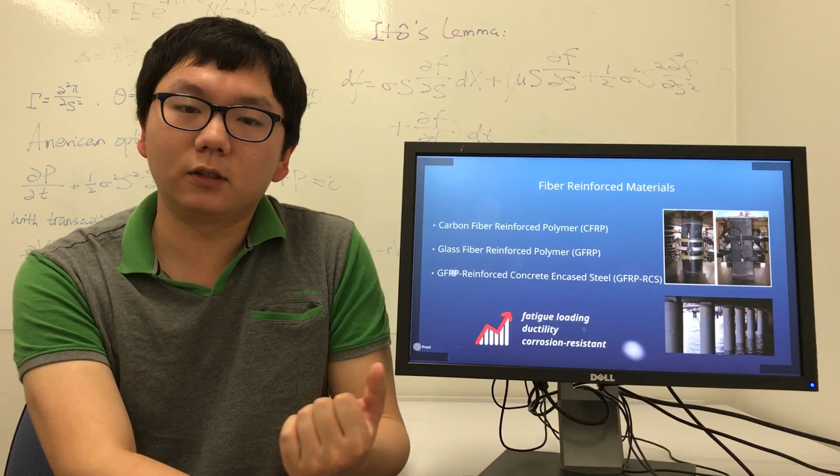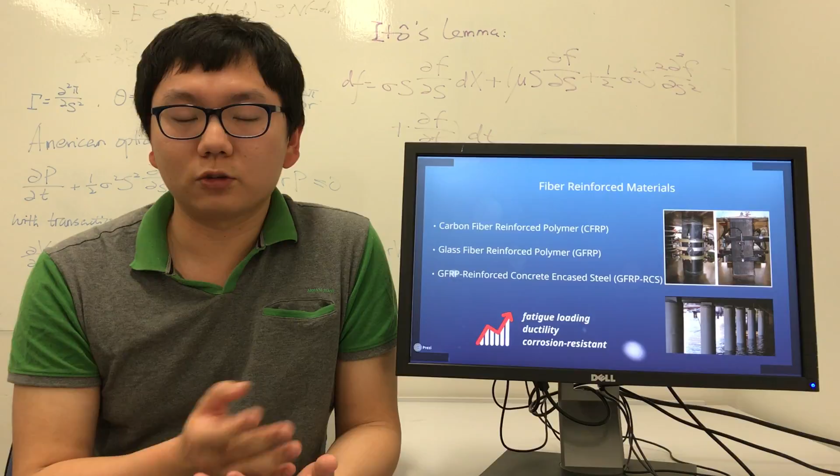And in reinforcing the concrete column, the most popular reinforcement is attaching external material. For example, the carbon fiber reinforced polymer and the glass fiber. These two materials could improve the column with fatigue loading and ductility. Also, the glass fiber could increase the column's resistance to corrosion.

And another one is textile reinforced mortar. This material could improve the concrete column as efficiently as the fiber reinforced jacket, to improve the column's ability to deal with seismic loading.

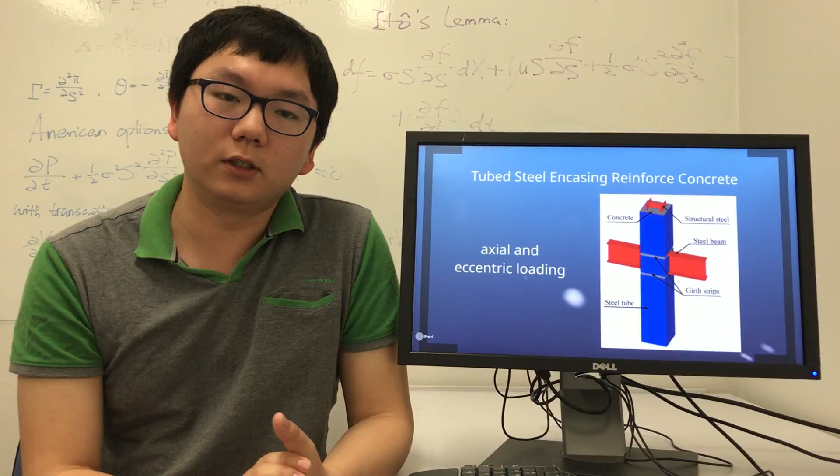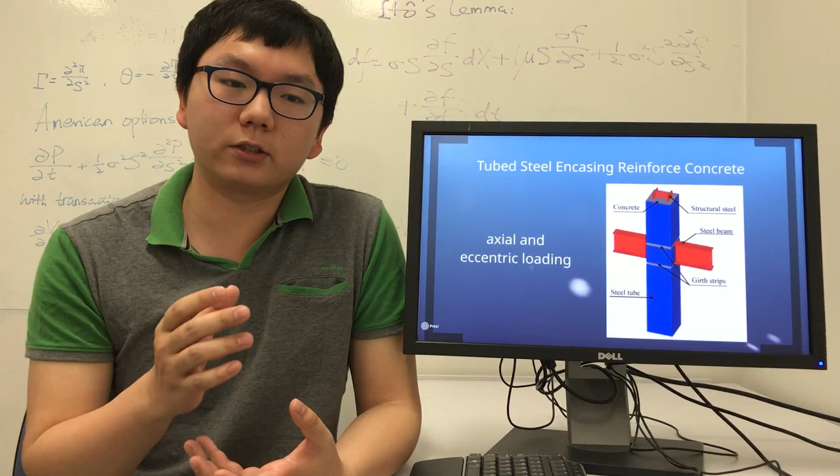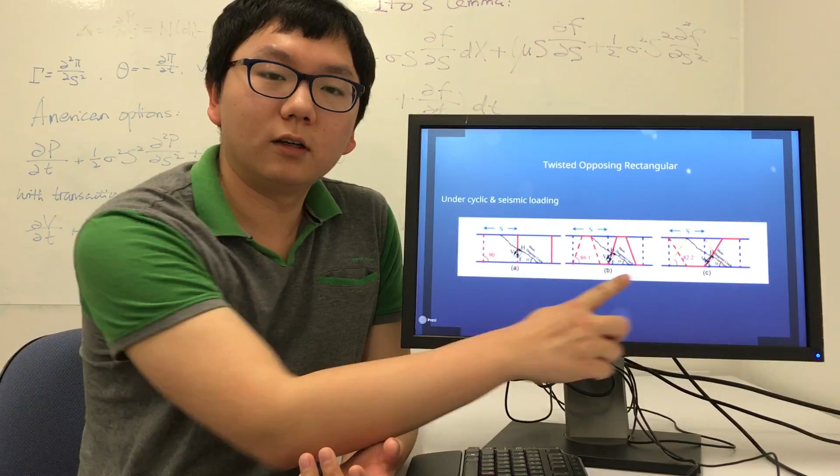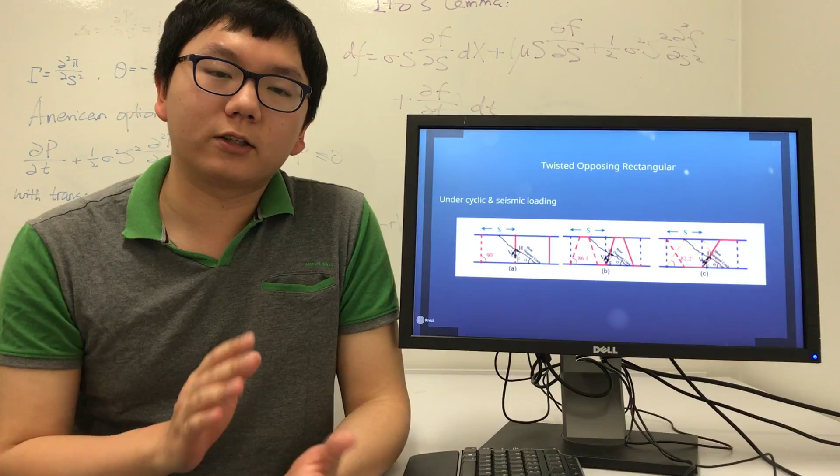The second method to reinforce the column is to use spirals and stirrups. Firstly, the twisted opposing rectangular method is this chart. It uses two twisted opposing stirrups to confine the column, and it is compared with the conventional one and the single stirrups. The result shows that this one could let the column perform better under seismic loading. However, this method also could consume more energy.

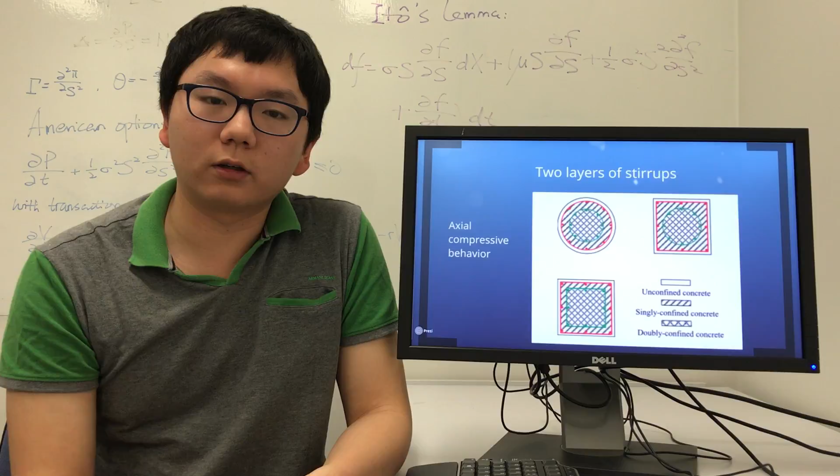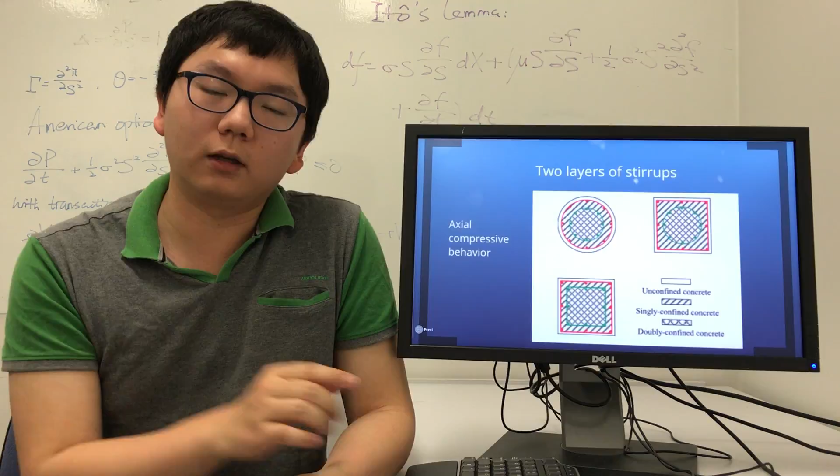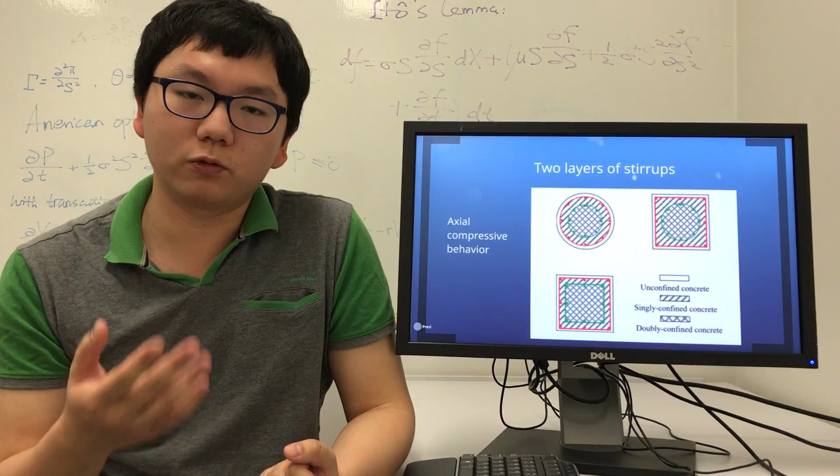Another one uses 2 layers of stirrups. This experiment shows 3 types of column, like this: 2 circles, 1 circle in a square, and 2 squares. He used these 3 columns to show that no matter what shape the concrete column is, the 2 layers of stirrups could improve the behavior under axial compression.

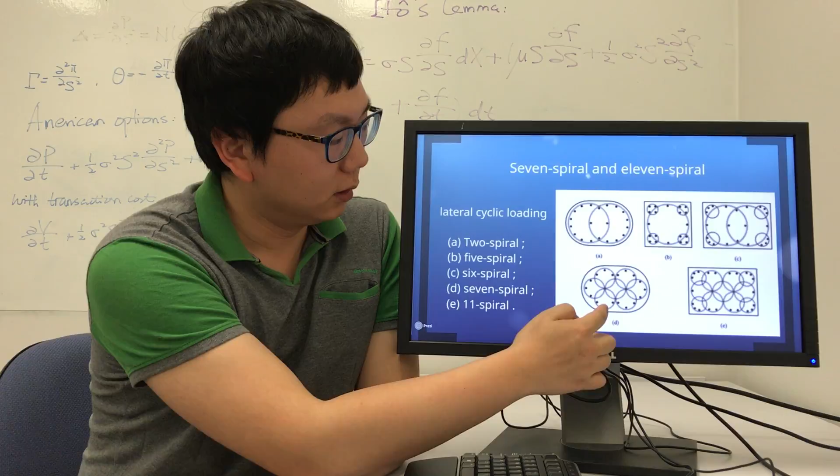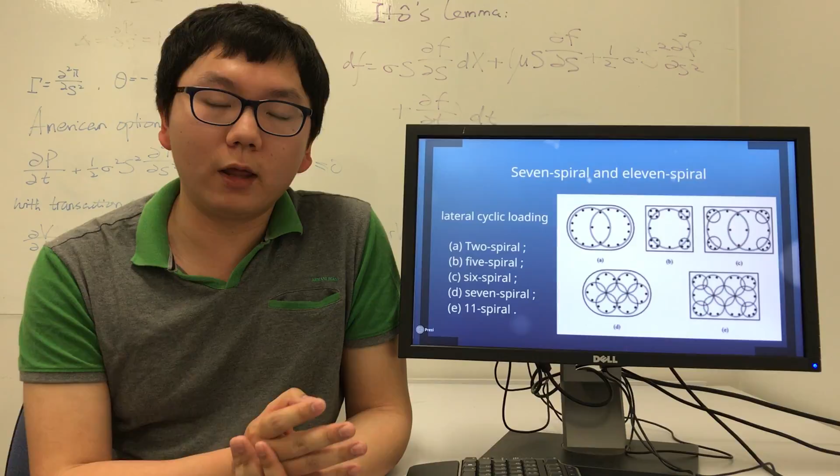The last one is the comparison with different spirals. As you can see in this chart, the research developed the comparison with different stirrups. The 7 and this 11 performed better in this test, the cyclic loading test, but they also cost more man hours. As you can see, it's a very complicated structure.

And the shape memory alloys. This is a metal that could recover its shape after it changes after loading. So this could be used for seismic loading, and the result shows it's very promising. However, it could only be used in the long-term earthquake.

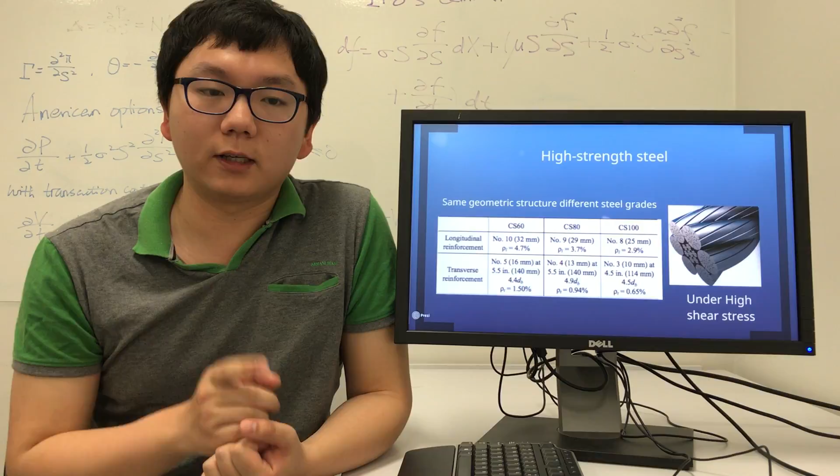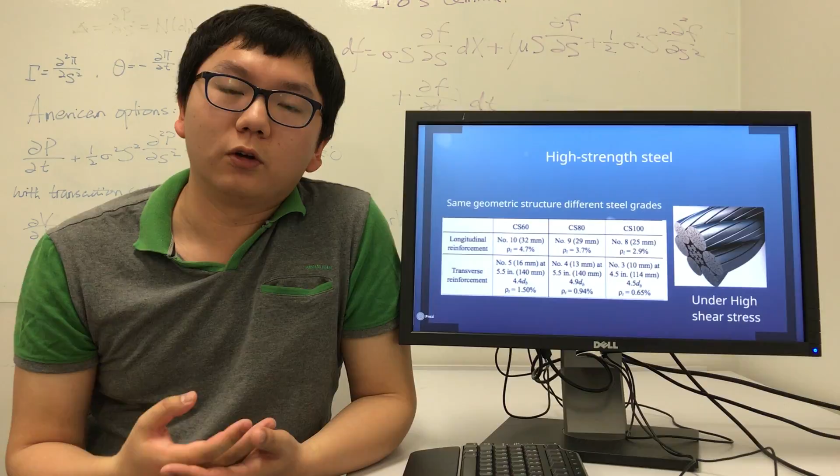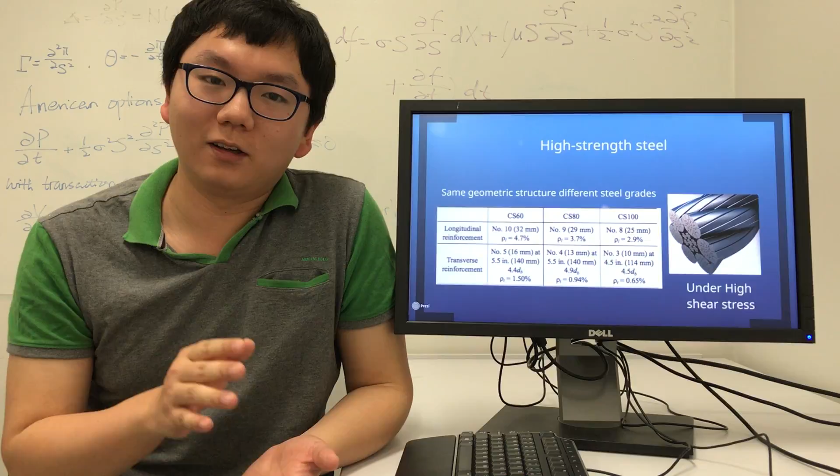And the last one is high strength steel. This uses different steel grades in the same geometric structure, and the test result shows that under high shear stress, the different grade steels show different abilities. The stronger steel could carry more loading, but it shows less ductility. On the contrary, the one which could carry less loading shows more ductility.

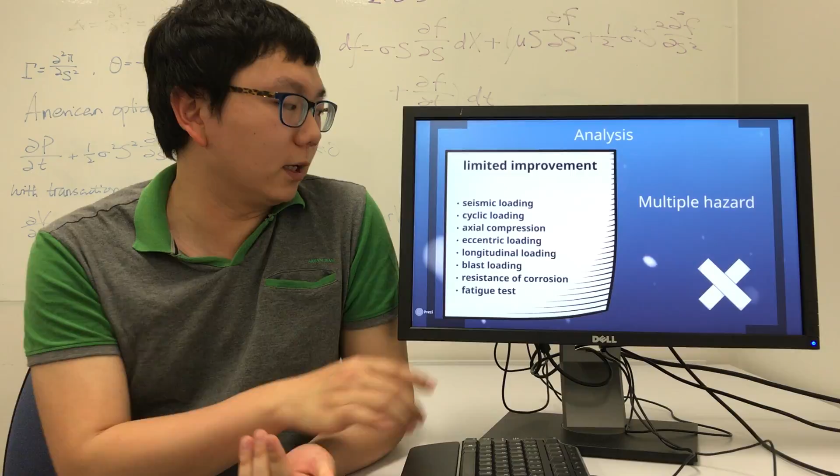So in all these previous studies, the reinforcement was aimed to deal with one particular disaster, like on the list. But how do we deal with multiple hazards? I mean, a place like Japan always has earthquakes, but if a tsunami happens there, the buildings and construction will be vulnerable again. So the residents are still threatened by the disaster.

So to solve this problem, I designed it like this. The first is to set a specimen group. This group has concrete columns, and each two are reinforced by a different reinforcement. For example, if we have 10 reinforcements, this group will have 22 specimens, including 2 conventional columns. The second is to set the tests. The tests will cover all the possible disasters and simulate all the loadings. So the group number should be equal to the amount of the tests.

The third is to analyze all the data and evaluate it, ranking all the reinforcements by their behavior in each test, then selecting one best reinforcement in each area: one for the external attachment, another for the spiral or stirrups, and the third for the alternative material, and integrating these 3 methods into one column and testing all over again. So this could provide an insight into the multiple reinforcement column.